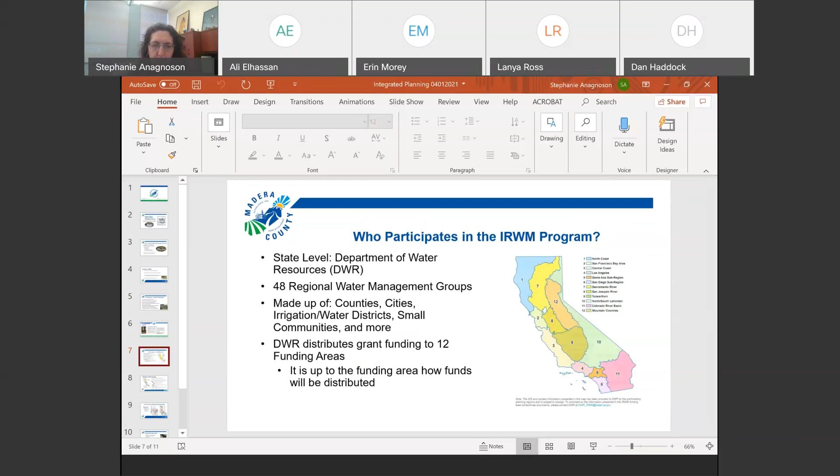So who participates? You can see statewide there are different funding areas. I used to be in funding area 4 down here, which is the Los Angeles area - that was a very, very competitive group of people. And we are now in 2, a mountain area funding group and a San Joaquin area funding group. That's how IRWM works in our state - funds are given by funding areas, so it's important to know where you are.

So what we have continued to do is use IRWM statewide to get additional funds. Most recently, what we've done is smart meters in a couple of different places - one in the foothills and then in a couple more urban areas down in the valley. So that's the sort of funds that are available. We are in those two funding areas, both a mountain county one and a San Joaquin River funding area, which is down in the valley floor.

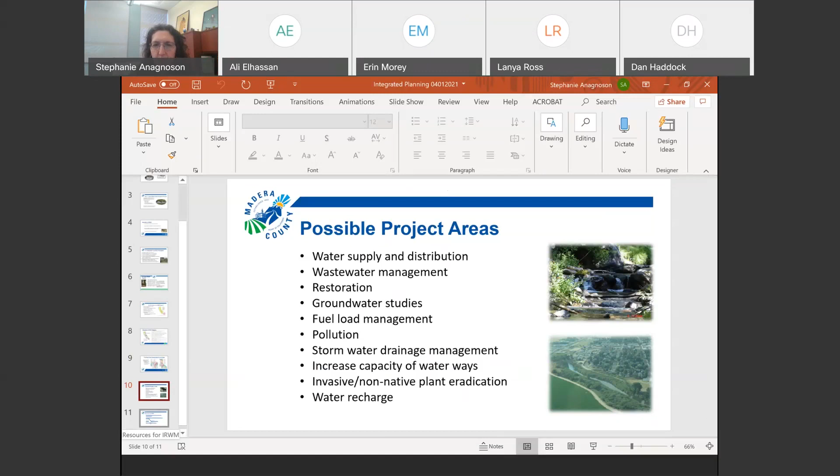So that's just kind of a brief overview of what we've been able to do with integrated water resource planning locally.

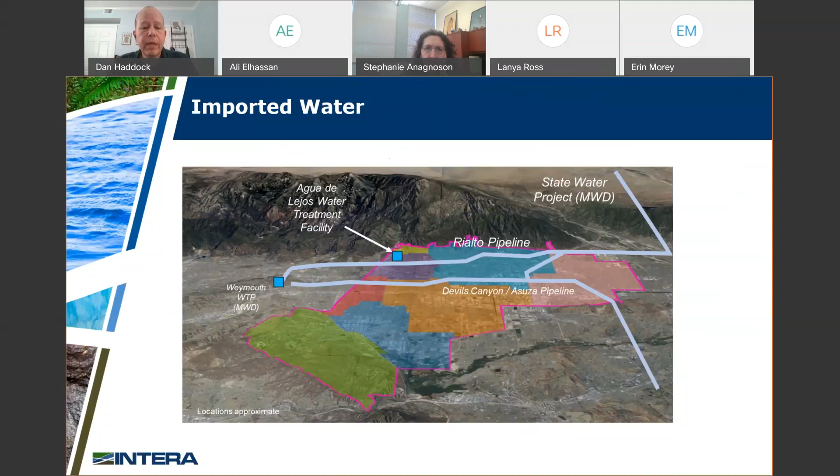The Chino Desalter Authority, or CDA, is an example of the kind of regional project that IEUA would support. The CDA was created to extract and treat about 40,000 acre feet, or 13 billion gallons a year, of impaired groundwater in the southern portion of the Chino Basin. This is high TDS, high salinity water—there's a long history of agriculture in the area, and much of that's been replaced by development.

This is a key component of basin management. It provides hydraulic control of the basin, and it also extracts high TDS water to manage the salinity in the Santa Ana River. About 16 MGD average of water from this goes to agencies in Chino Hills and Ontario, and some of the rest goes to other agencies outside of IEUA.

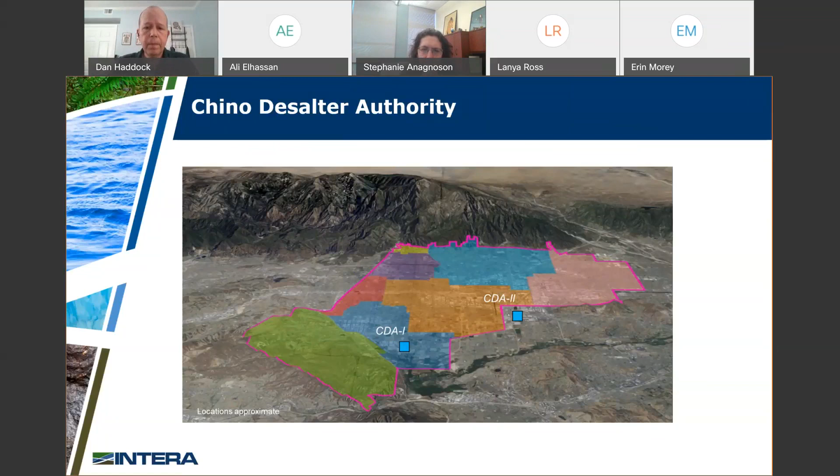Local surface water is also a supply, a small one. Some agencies in the northern part utilize these roughly 11 million gallons per day on average, and these supplies are vulnerable to drought.

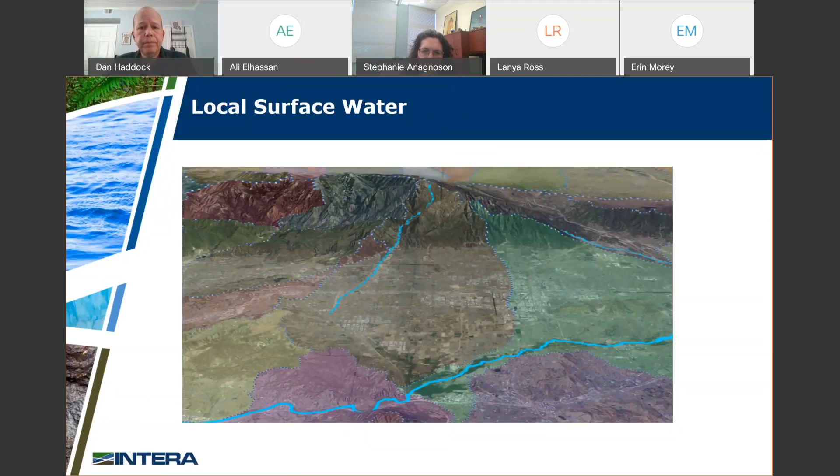Local groundwater is a significant resource in the region, and it's key to the region's water supply resiliency. There are multiple groundwater basins, and the Chino Basin is the largest, located in the center. It has significant groundwater storage and banking potential, about 500,000 acre feet storage capacity, or 165 billion gallons.

In a typical year, the region uses a little more than 100 million gallons per day of local groundwater. Challenges to this supply include groundwater impairment, former agricultural and industrial activities, and potential regulatory changes.

There are changes to the maximum contaminant levels, or MCLs, for perchlorate being considered to lower the state's MCL from 6 parts per billion to a lower level. Regulation of per and polyfluoroalkyl substances, or PFAS, such as PFOA, PFOS, and PFBS, all have notification and response levels. The Chino Basin Watermaster manages the adjudicated Chino Basin and has a tremendous amount of data that's really vital for planning.

Water quality impairment has a significant impact on the use of local groundwater resources. Using data assembled for the model I'll be describing, this pie chart illustrates the portions of the region's groundwater that currently require treatment or blending.

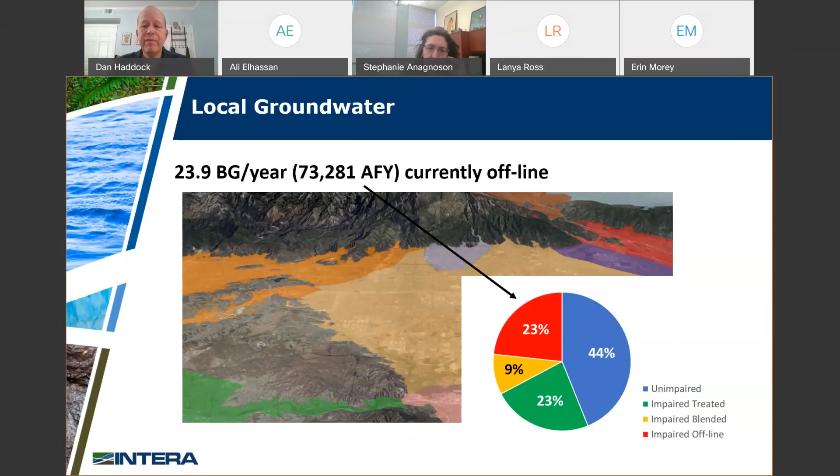There's some blending allowed for certain uses as drinking water, and some supplies are currently offline. Currently, a little less than a quarter of the groundwater supply capacity is offline, primarily due to water quality impairment. This is based on current regulations and would be further impacted by future changes in regulations and detection of contaminants of emerging concern, such as PFAS or others.

Finally, there's a web of interconnections between IEUA agencies and to other agencies outside of IEUA. I don't expect anyone to be able to read this flow chart, but it's just to illustrate there are a lot of interconnections. Some of these are active and others are standby for emergency use, and these all provide opportunities for these agencies to share supplies when they're needed.

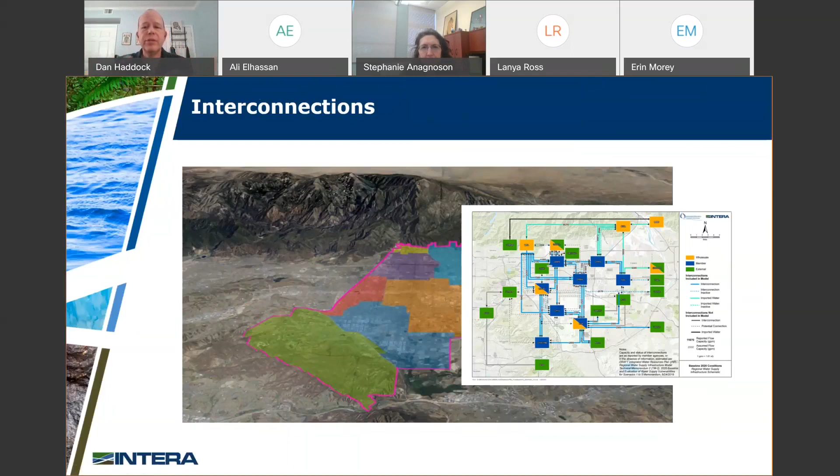IEUA also supplies recycled water for direct use, and they also use it for groundwater recharge. In 2019, about 15 million gallons per day average was supplied for direct recycled water use, and about 11 million gallons per day on average was used for groundwater recharge.

Recycled water is not included in the model that we're going to be talking about. It's just potable water.

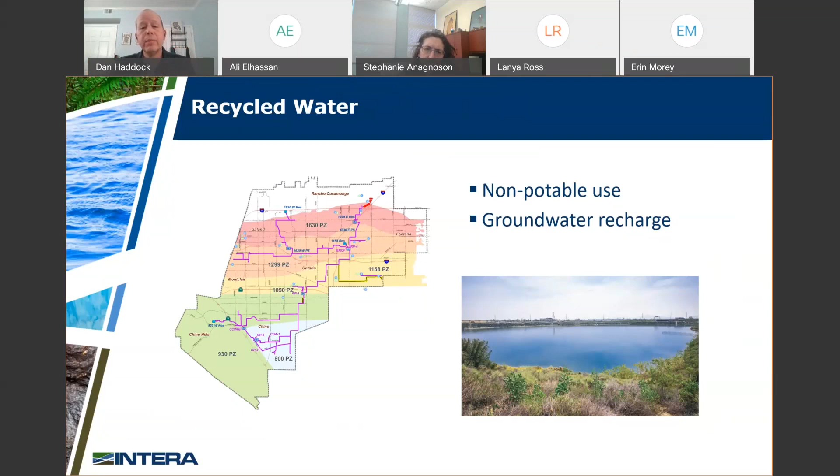So the IEUA's Integrated Water Resources Plan. Integrated water resources planning is necessary to efficiently manage all these resources in a way that provides benefits for all in the region. IEUA's 2016 Integrated Water Resources Plan, I'll refer to it as IRP to shorten it, shown here, is the region's blueprint for ensuring reliable, cost-effective, and environmentally responsible water supplies.

To provide better support for collaboration, in 2018 IEUA initiated development of the IRP Infrastructure Model as a decision support tool to evaluate different infrastructure and management strategies that could improve the resiliency of the regional system. The model includes major infrastructure such as major pipelines, pump stations, treatment facilities, wells, surface water supplies, pressure reducing valve stations, and interconnections. It's really regional in scale and looks at regional issues.

It doesn't try to duplicate the detail of agency level distribution models. The agencies cover that with their own work. The current model is a water budget distribution model only, and it doesn't directly incorporate or link to groundwater models developed by the water master.

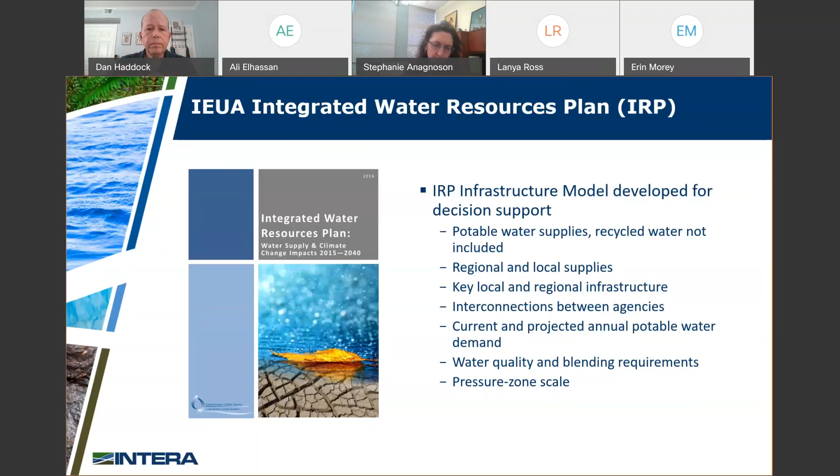Now I'll talk a little bit about the model itself. To gather and verify the information used to build the model, we reviewed all kinds of existing planning documents provided by agencies and had one-on-one meetings with them to ensure that understanding.

The model is really focused on the key constraints to moving water from zone to zone within agencies and then between agencies, to look at these regional problems. Reviewing feedback from the water master and others was also very critical. The exercise in building this was very useful for sorting out some inconsistent information, just differences in the way different agencies understood what the capacities of different interconnections and things were.

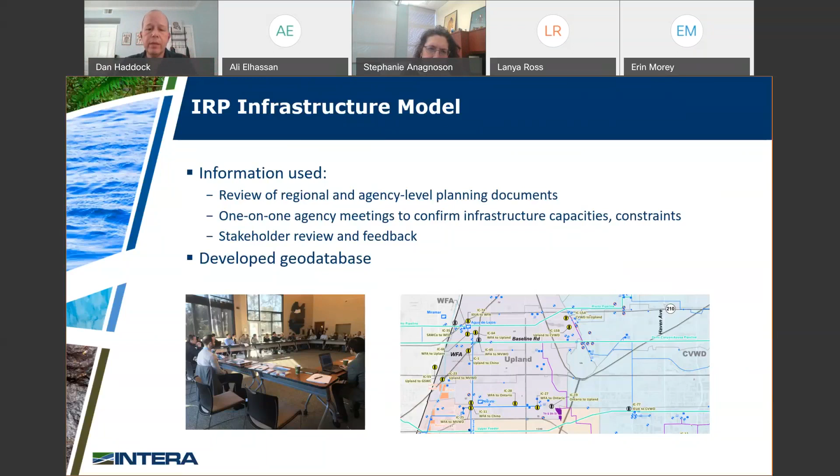Out of this, a geodatabase was produced that contains basically all the IRP relevant information on all the major water supply infrastructure in the region. The geodatabase is expandable, and it's actually already been expanded to include some other agencies outside of IEUA that might be collaborating on future projects.

The model is built in InfoWater, which is the software that IEUA uses, and it represents a regional system. It doesn't duplicate that member agency or retail agency level of detail. It represents the water balance at the pressure zone level, and includes all supplies, interconnections, and hydraulic constraints pertinent to the ability of the agency to meet demands in that pressure zone and to move water from zone to zone.

Some of the wells in the region have blending requirements, and those were all identified by those agencies. In the model, those wells have to have an adequate supply of suitable blending water in order to remain in service.

In the baseline model, supplies are used as needed to meet demands. Then in scenarios, we'll look at all the supplies available in each scenario to illustrate where potential surpluses and deficits exist.

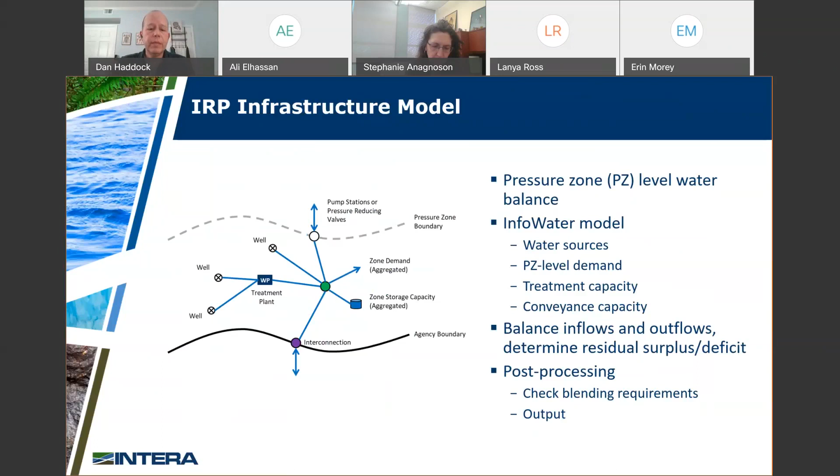The 2020 baseline of demands and supplies was used to validate the model results. As previously mentioned, the member agencies provided input on vulnerabilities that they saw in the region, and some of those include the shutdown of the State Water Project, the Rialto Feeder, water quality impairment, regulatory changes, and severe drought.

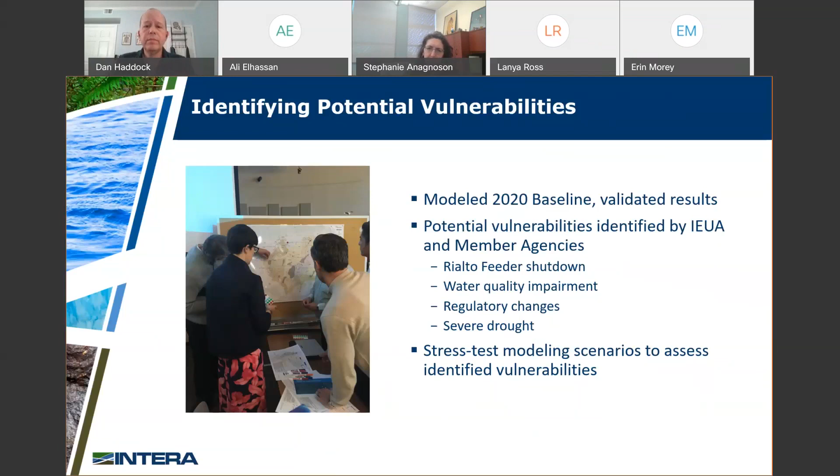From these vulnerabilities, scenarios were developed to stress test the regional system and assess the relative risk to the region and to individual agencies presented by each of these vulnerabilities. The six scenarios used to stress test the regional system are listed here. They range in likelihood from very likely - basically certain, like they know the Rialto Feeder will be shut down - to unlikely, an exceptional drought beyond what they've seen before on top of regulatory changes. That range and the likelihood of each scenario factors into the calculation of risk.

I'd like to take a brief moment to explain the regulatory change scenarios, because that was an important one. Based on review of current regulatory activity - what we see coming in terms of PFAS regulation and the potential change to the MCL for chlorate - and input from member agencies on what they're concerned about, those two things were identified as anticipated. Those are coming in some form or another.

Scenarios were developed based on well-specific data where it was available and general data where it wasn't, to craft those scenarios. And then finally, an unknown future regulatory change, which is for a yet-to-be-identified contaminant of emerging concern, was also considered.

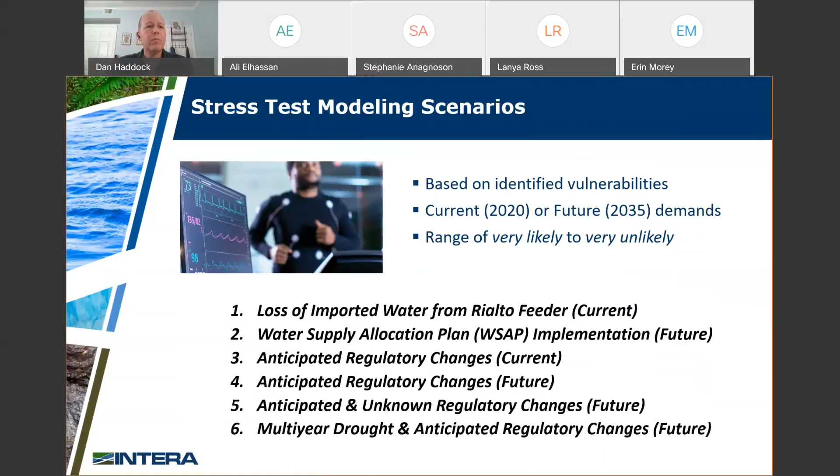For the stress test results, based on all these scenarios, the model was run with all available supplies, given the specific constraints of each scenario - water quality impairment, hydraulic constraints, everything. The results reflect the regional system.

The results of these stress tests reflect the regional system as it is, and they don't necessarily reflect projects that some of the agencies already have in the works. They know what some of their vulnerabilities are, and they're already working to address those.

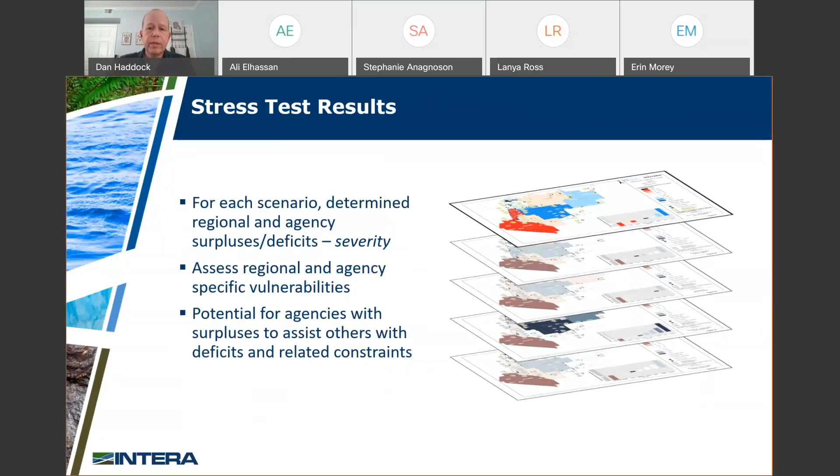With the model results, the surpluses and deficits were determined at the regional and agency levels, and a combination of them was used to rate the severity of consequences of each scenario. Then the severity and the likelihood were used to calculate the risk represented by each scenario.

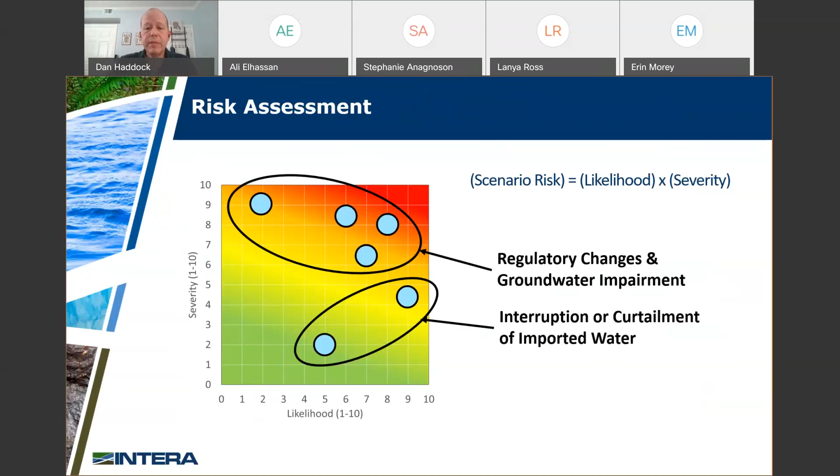We can begin to see the relative impacts of specific vulnerabilities and potential opportunities to address them. Here we see that the highest risk scenarios all share vulnerabilities related to impaired groundwater and regulatory changes, and that in general, this presents a greater risk than interruption or curtailment of imported water supplies. Again, specific agencies may see this differently given their specific circumstances.

With this, we can illustrate the value of different water infrastructure and management strategies. Two significant areas are groundwater treatment to provide resiliency against regulatory changes, and enhancing those local supplies to provide resilience against interruptions.

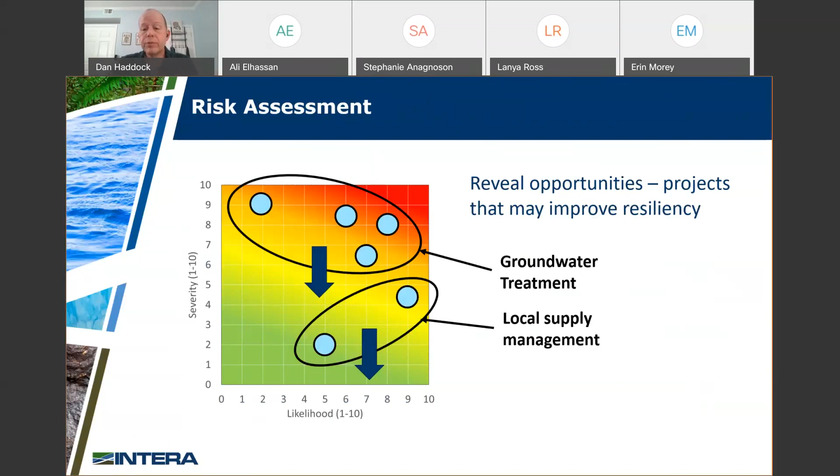These projects that agencies have in mind may also be aided by other regional infrastructure projects to share those benefits and costs with others, with some of their neighbors, and optimize overall capital efficiency. Each scenario, or the stress test results with proposed projects, will be compared to the baseline to evaluate benefits.

So the next steps in the region are to explore these opportunities, and this is for a future update of IEUA's IRP, to evaluate project portfolios and management strategies. The model will be used first to help agencies evaluate the resiliency benefits of projects that they already have in the works, and to identify potential synergies between those projects and maybe some regional projects.

It could also be used to explore the potential benefit of temporary transfer of some IEUA or CDA capacity rights from agency to agency, from those with surpluses to those with deficits.

IEUA will work to collaborate with member agencies to develop regional project portfolios that complement the agency's own projects. Those portfolios will be stress tested compared to the baseline, and the risk reduction quantified at the regional and agency level. These results will be used to understand shared benefits, negotiate cost sharing, and, very importantly, to obtain some of the grant funding that Stephanie spoke of.

Beyond the future update of the IRP, the infrastructure model also provides a tool for ongoing regional collaboration. Some areas of future work that IEUA's talked about are collaborating with the Chino Basin Watermaster to better understand the water supply risks posed by PFAS and other contaminants as more data is obtained, and also to evaluate the resiliency benefits, in a more systematic way, of current and proposed regional programs.

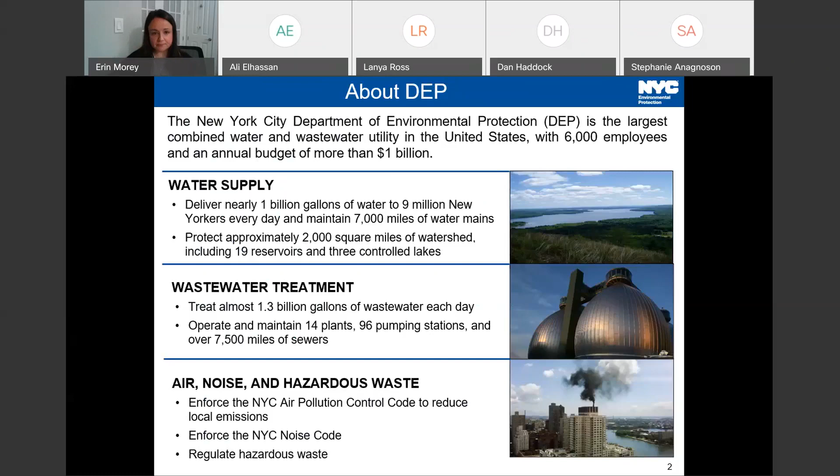So at DEP, we have a small but mighty, in my opinion, integrated water management team. There's 5 of us on this team, and we are leading this One Water effort at DEP. And we're in the Bureau of Sustainability, so we spearhead policy development, innovative partnerships, studies, and pilot programs to reduce system demand, protect our critical infrastructure, increase cost efficiency, and promote equity.

And through our efforts, we're aiming to balance all the competing needs, competing infrastructure needs, and the future risks associated with climate change, and also the increasingly stringent regulatory requirements that we face as an agency, while making the best use of our resources and also keeping rates affordable for our 840,000 customers.

So that's a good segue to my next slide, which is why One Water and what are our drivers and challenges? Well, we have many of them. Some of them are shown here.

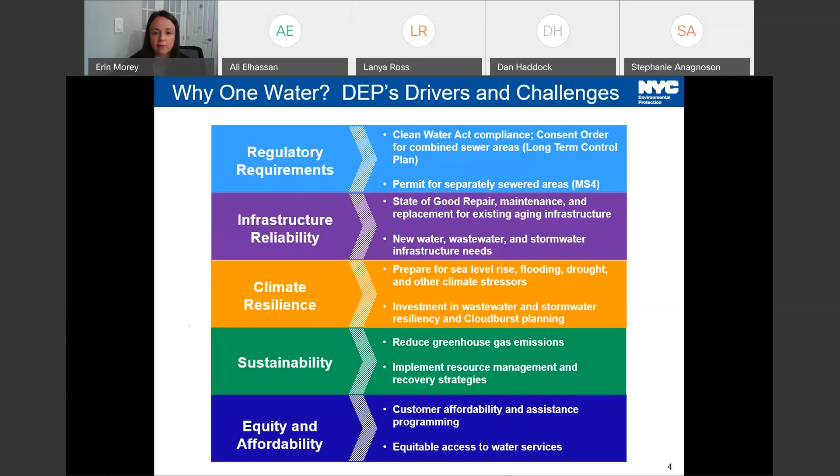So we're exploring how we can better incorporate affordability and equity into our investments and how to balance these competing needs while ensuring that everyone in New York City has equitable access to our resources.

So with those challenges, what are our objectives for One Water? We believe that One Water as a framework offers us the opportunity to turn all of those challenges into implementable solutions. And ultimately, we believe that we can help to create this collective long-term vision for a more balanced approach to managing our water resources with widespread support, we hope, across DEP, our regulators, New Yorkers, and stakeholders alike.

So for more than 2 decades, we have funded and implemented a comprehensive long-term watershed protection program that focuses on both proactive and corrective initiatives to ensure that our source water quality, which serves nearly half of the entire state of New York's population, remains extraordinarily high.

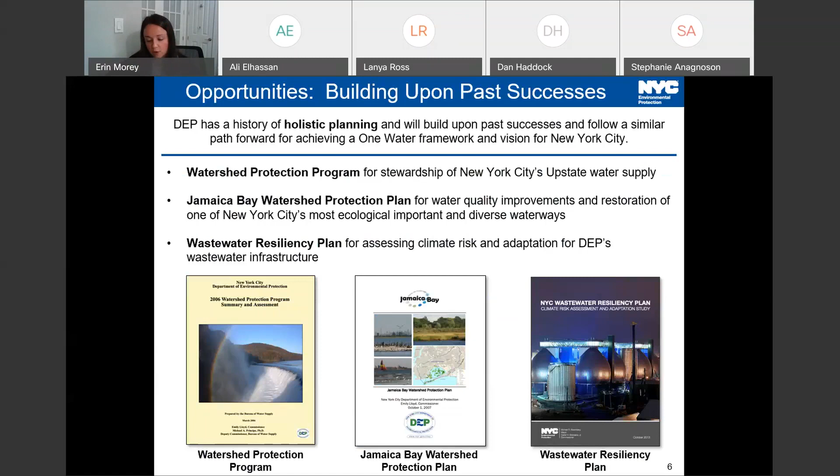So moving forward in the immediate future, we're going to continue to define our goals, metrics, and outcomes. We're going to continue internal engagement across our agency and also begin our external stakeholder outreach. In addition to building upon our past successes, we're also following the example of other cities who came before us, and we're actively engaged with them, including Seattle, Denver, and Los Angeles. We recognize that many cities have had huge success with this approach, and we're looking to learn from them.

Ultimately, our goal is to release a plan in 2023 and incorporate our One Water approach into the next citywide sustainability plan, which will be due in April 2023. Our plan is mainly going to be an in-house effort, and will build upon our current initiatives and past initiatives, our pilot programming, studies, and research. At the end of the day, what we're talking about here is to create this paradigm shift and achieve this more balanced approach to all of our priorities and goals.